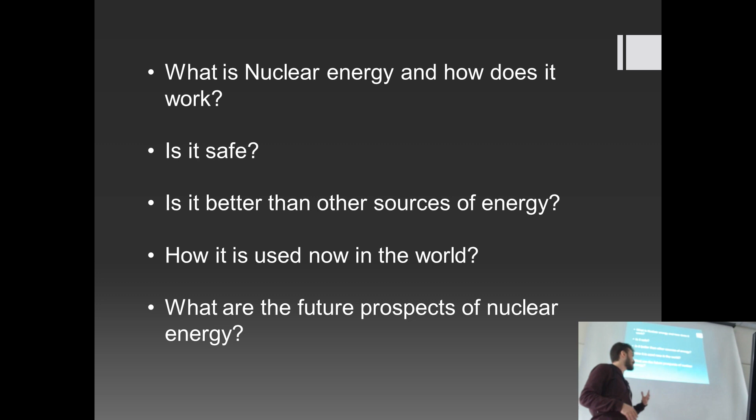The next step, when those other questions are answered, is: is it really better? So, okay, we understand how it works. We understand that it may be safe. So is it better? We're going to answer that. And then we're going to see examples of how it is used in the world and the state of the art per se. And after that, we're going to see a look into the future and basically what we're going to do with nuclear energy in a few years or maybe a century.

So, starting at the first point, what is nuclear energy and how does it work? In a nuclear reactor, atoms of uranium, not necessarily uranium, there are some other atoms like thorium or plutonium, for example, that have radioactive properties, but mostly uranium is used due to its abundance and facility to use. So the atoms of uranium are forced to break apart, and that process is called fission. There is also another nuclear reaction that is called fusion, but we cannot use that for energy yet. So I'm going to discuss it a bit later.

So basically, when the atoms break, they release particles and energy, heat at the same time, because the particles vibrate. So we release mass and energy at the same time. And that we use to heat water, basically. We have the core of uranium, and there goes the chain reaction: one atom breaks, then the other breaks because it hits the atom, and the sheer force of the atomic particle breaks the atom apart, and that keeps going. So that's what happens and causes a chain reaction that releases mass and heat, that is energy.

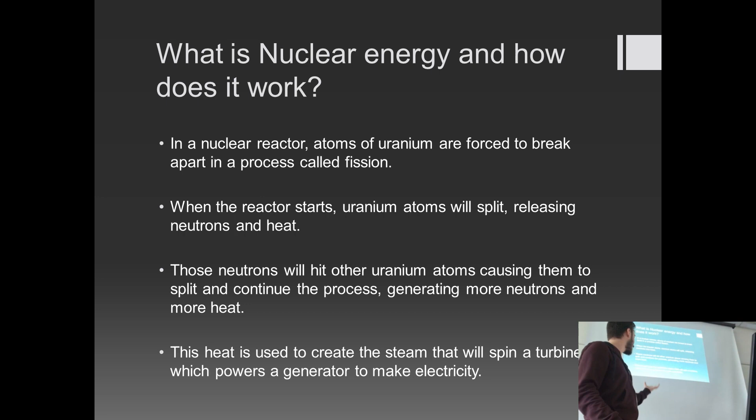And we use that very simply, actually. It's honestly kind of funny when you think about it, because we do all that just to heat water. And then we heat water, use the vapor of water to turn a turbine. And from that, we use a normal generator. So that's how we produce energy from nuclear energy.

How is the nuclear fuel made? Because we don't just take uranium out of the mines and put it in the nuclear reactor. We have to process it. We have to mine it, then go through a process of oxidation so that the uranium becomes solid and a little less volatile, but not really. It's still very reactive, but it's more controllable, because it's way easier to manipulate a solid than a liquid. So that's why we do it. And it helps in some properties of the atom, and it could help, not in all the cases, in producing the isotopes that we want to generate the chain reaction.

So after that comes the main part, that is the enrichment of the uranium, that basically is concentrating a type of uranium in a mixture of very large quantities of isotopes of uranium. If you don't know what an isotope is, it's basically the same type of atom, just with a different mass. It's still uranium, it has the same amount of protons, the same amount of electrons. The only difference is that it has a different amount of neutrons.

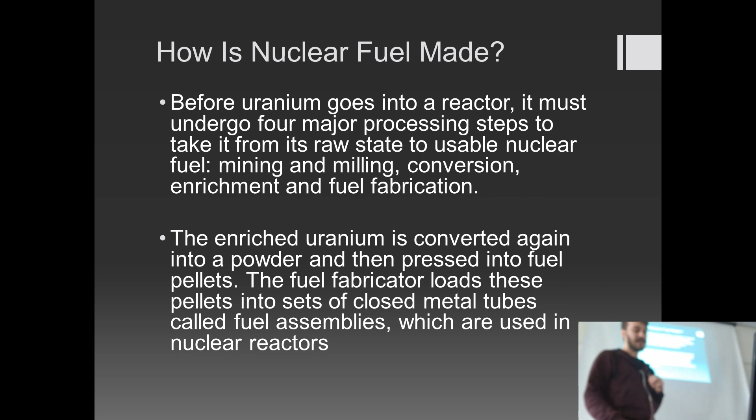So we want a specific amount of neutrons to cause a little instability in the atom so that when it gets hit by a neutron, it shatters easily. So that's what we do when it comes down to enrichment. We concentrate a type of isotope that has less neutrons, and consequently less structural force, so that when we hit it with a neutron, we can break it easily. But really, it's not that much. The most part, like 98%, is still the basic uranium, the uranium-238. But we concentrate 2% of uranium-235, so that we can have better chain reactions.

So here, basically, is how fission works, and fusion also, I'm going to go through a bit of that later. So in nuclear fission, we hit the uranium-235, because it's easier to break, with a neutron, literally like shooting a bullet at the atom, and it gets more mass, but it gets a little unstable and breaks apart. Then it divides into an element that I think is barium or something like that, and krypton, and three neutrons that shoot out of the atom, and that's what causes the chain reaction. So one atom that breaks hits another three atoms that break.

Normally, not all of those hit, so it's kind of a statistical thing. Like it has a chance to hit, but it's almost impossible that it hits nothing. So basically, all of three hit, and that continues to happen in a lot of atoms. And as we do that, we release mass and energy because the particles vibrate a lot because they get heat and they start to shake, basically.

And nuclear fusion is a little more complicated, but it's kind of the inverted principle. We get two. This is the easiest way. There theoretically are infinite ways to do it, but we cannot. So this is how we know how to do it, and this is how the sun does it. That is hydrogen deuterium, that is a type of isotope of hydrogen, combined with another isotope of hydrogen, that is tritium. They literally collide and fuse together.

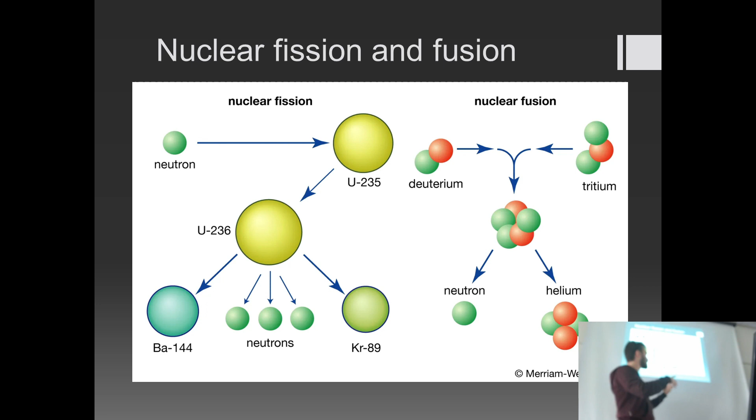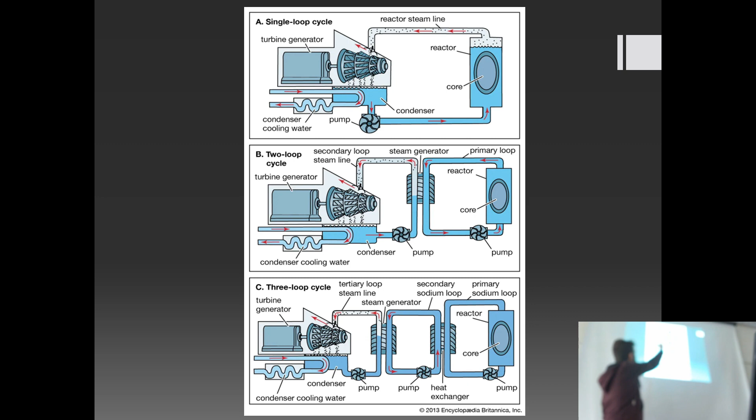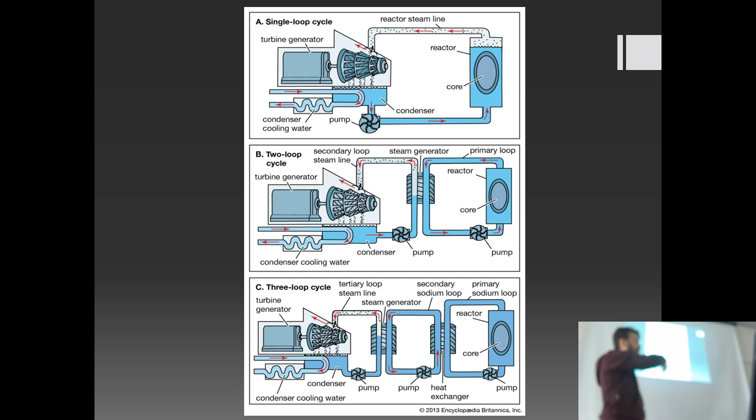Here's how a nuclear reactor works. That's what I was explaining earlier. So we have the one loop, the two loop, and the three loop cycles. They all do the same thing, but delayed. So for one cycle, we literally boil the water, it turns into steam, turns the turbine, and that generates electricity, and then it condenses in a condenser, and that becomes water again, and the cycle repeats itself.

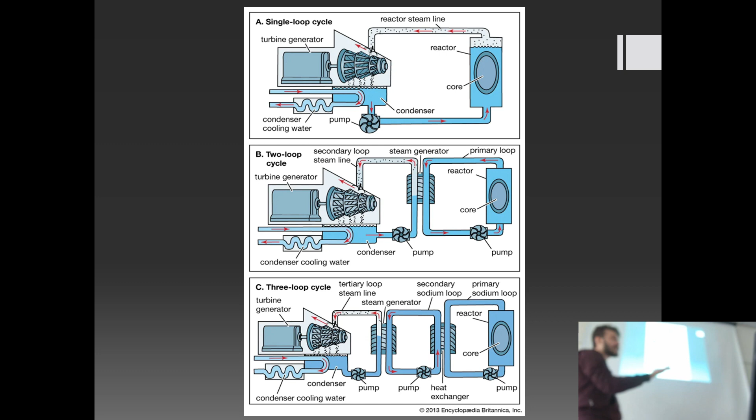In a two-loop cycle, we have the same thing, but it's for safety measures. Because when water boils with uranium in it, you can kind of imagine what would happen if that spilled or shot in an undesirable way. So that is for safety reasons. Because when we do that, we have a pressurized environment there. It's this case here. Don't know if you guys can see it, but I hope so.

And it maintains pressure so that the water does not boil while heating up. And then water heats up more water, but in another pipe so that that water doesn't boil up, and it continues. And that's basically it, the whole process.

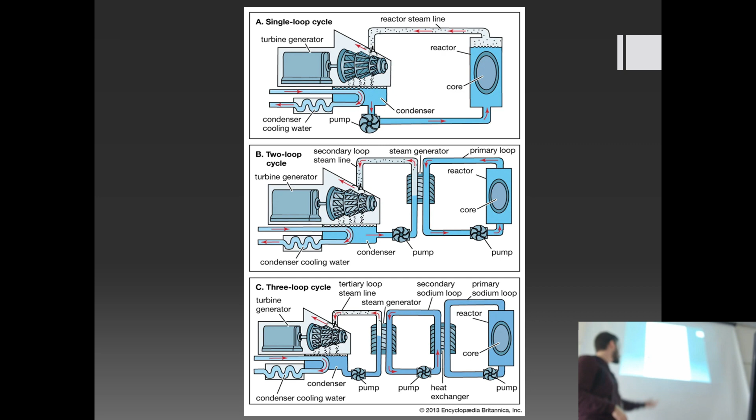Now the next big question, is it safe? Is nuclear energy really safe? Well, according to Bill Gates, nuclear energy in terms of an overall safety record is better than other energy. The key for the safety in nuclear energy is the multiple independent layers of protection and security. Like every system of a nuclear power plant is completely unrelated and independent from another system. Like if something breaks, the other continues working.

There's no problem. And there's a lot of layers and a lot of reserves. Like when something breaks, there's something that does the same thing that takes its place. So it's very hard for it to break. There's also multiple physical barriers that protect against uranium spills and radiation. So pretty safe. It's almost impossible that radiation could go through. Statistically speaking, it is possible, but not really. Everything is possible, but statistically speaking, it's not. So there are several redundant and diverse safety systems that ensure the security in the power plant.

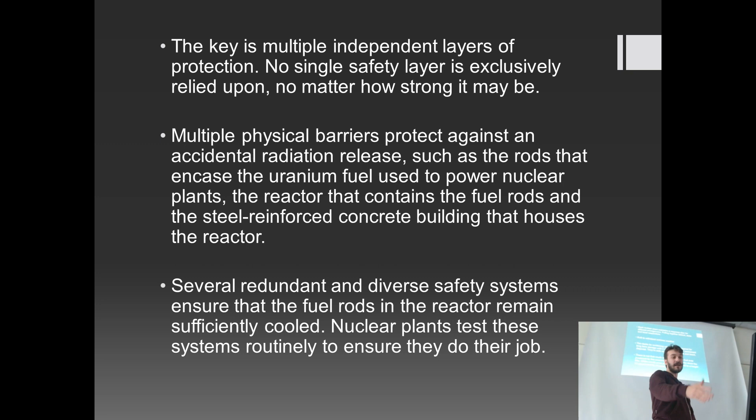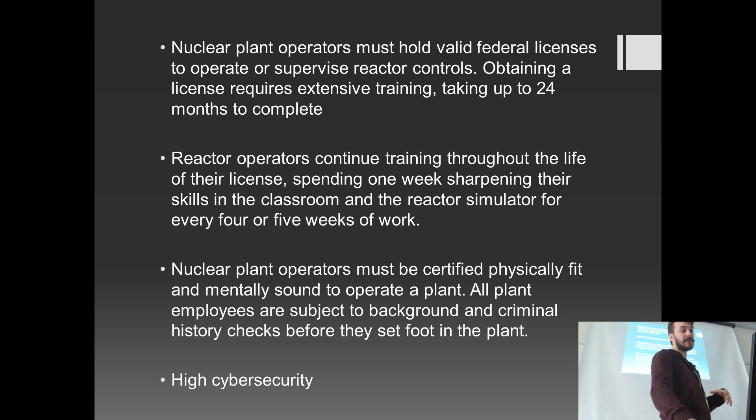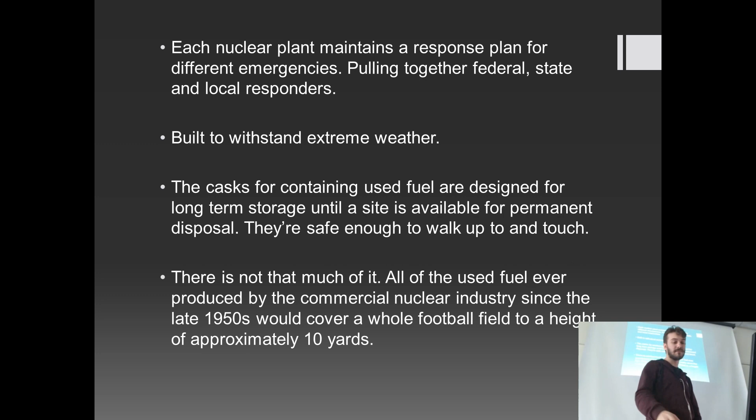And that's basically it. They are built to withstand extreme weather like hurricanes, tornadoes, earthquakes, volcano eruptions, what else? Tsunamis. Really, it's impressive. It's an impressive building. The rest is basically the same. The only thing is when it comes down to throwing out the trash, the uranium trash, the nuclear trash, because we think there's a lot of it and it pollutes a lot, but not really. All over the years, from 1950 till today, it has only produced like a football field of nuclear waste. So that's pretty low when you think about it.

So well, we've discussed how it works. We've seen that it's relatively safe, pretty safe. And is it better than other sources of energy? That's the question now. And well, yes and no, really. When it comes down to energy types, it's really the tool for the job, but it has a lot of advantages. For example, unlike other sources, nuclear power does not release carbon into the environment, so that's pretty good.

It is a green source, and unlike hydroelectrics, for example, that we have a lot in Brazil, it does not damage the environment in its building. Hydroelectrics need a lot of space and they sink a big part of the nature and the forest, and that is pretty damaging.

So nuclear energy does not need that. It's kind of like a building, really, and they also work 24/7, all day, every day. They just stop for maintenance. And that doesn't happen in other sources, like solar energy. They don't work well at night. Eolic energy doesn't work when there's no wind. Hydroelectric energy: if there's no rain, we have a big problem because, as we see right now, it does not produce enough energy.

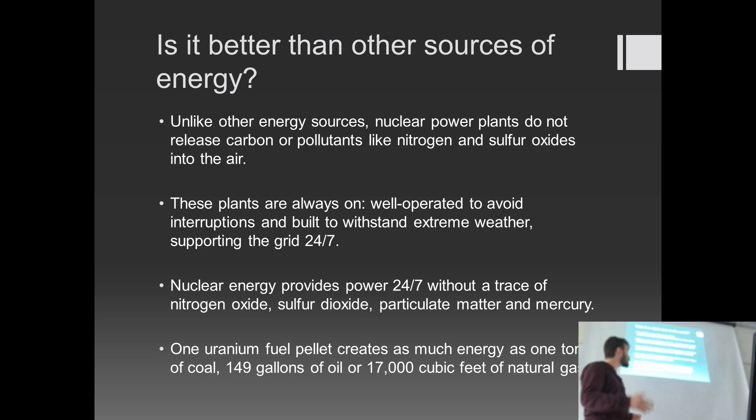So how is it used now in the world? As of 2011, about 15% of the world's electricity is generated by nuclear power plants. And wow, that's a lot, right? Nations such as Lithuania, France, and Slovakia create almost all their electricity. France, for example, only sources of electricity are nuclear power plants and coal, and they turn off the thermoelectric power plants. Also, the USA has 92 nuclear reactors, and that's 20% of their electricity.

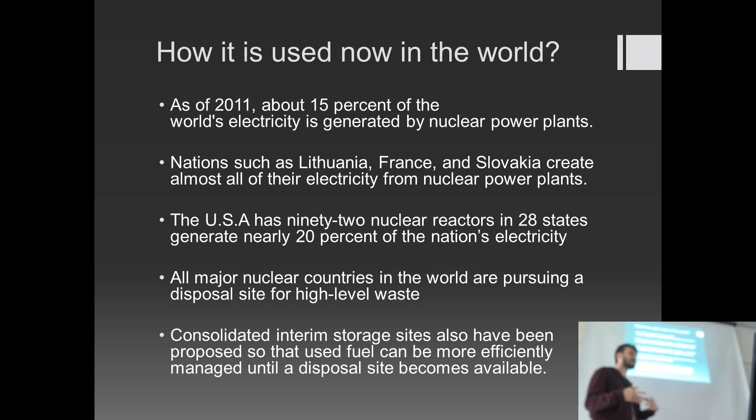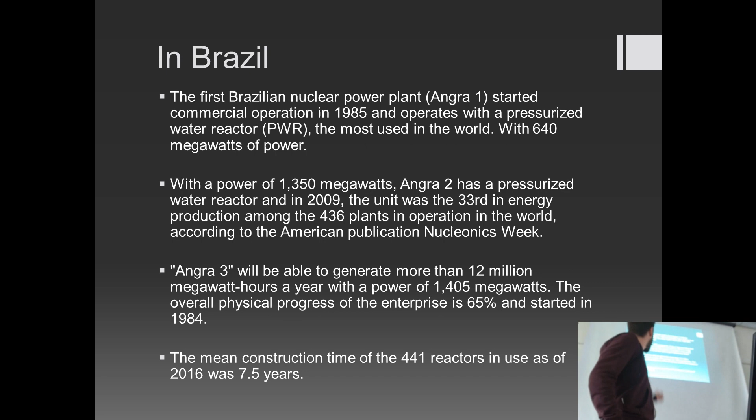In Brazil, if you don't know, we do have nuclear energy. We have the Angra power plants. We have Angra 1, Angra 2, and we should have Angra 3, but we do not. And mostly the energy is used only for Rio de Janeiro, but yeah, we do have those. So the first Brazilian power plant, Angra 1, started early, 1985, and it had 640 megawatts of power.

But as time passed, we got way better at nuclear energy. The second power plant, Angra 2, has 1,350 megawatts of power. And that was in 2009. And now we're building Angra 3. It should have been built already, since it started in 1984, but we still do not have it built due to many problems and political things. We estimate that 65% of the power plant is done, but as of right now, it's not usable. And it should have about 1,400 megawatts, but since the technology has gotten better, it may be more.

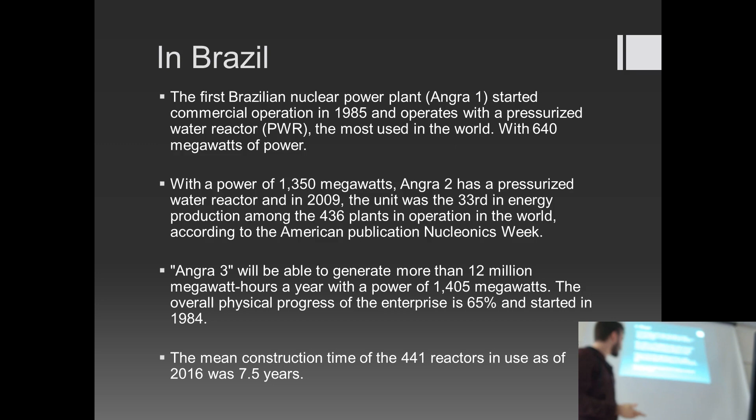And answering the last question, what are the future prospects of nuclear energy? Well, as I said earlier, nuclear energy can be produced through fusion, fusing atoms together, and that's what the sun does. That's how it produces energy. And that's what we are researching. We do not know how to safely use it, or actually we're not even capable of using it. As of right now in Germany, they discovered a way to make a fusion reactor, but it's still in the testing phase, so we cannot really affirm if it's safe and capable of producing energy like a generator would, for example.